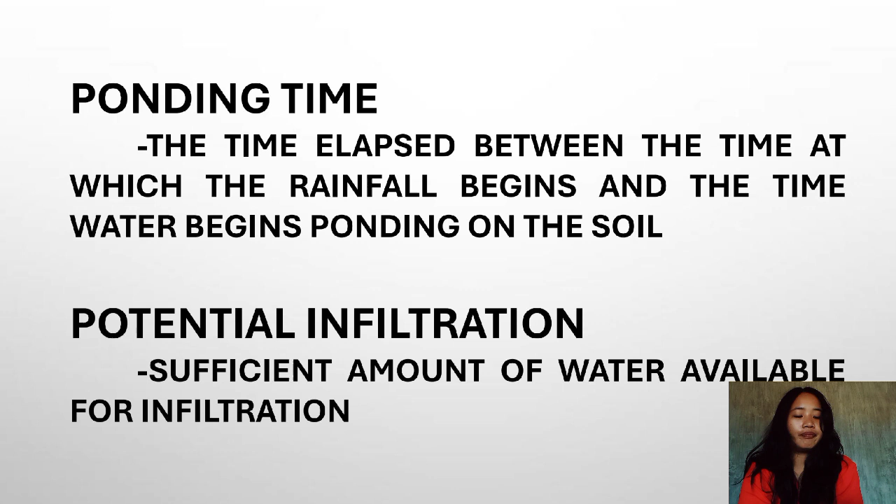Potential infiltration is the sufficient amount of water available for infiltration. Before ponding, the infiltration rate is equal to the intensity of rainfall, meaning that whatever rainfall is falling is infiltrated into the ground. After ponding, infiltration will be potential infiltration.

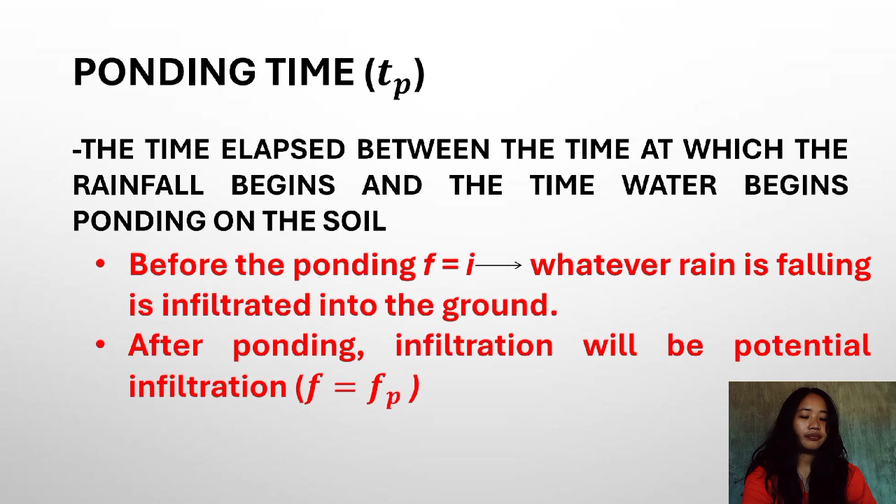Mein and Larson, 1973, presented a method of determining the ponding time using the Green-Ampt equation. So there are three principles involved. First, for time equal to ponding time, all rainfall is infiltrated into the ground. Second, potential infiltration is a function of cumulative infiltration. The last one is, ponding occurs when potential infiltration is less than the intensity of rainfall.

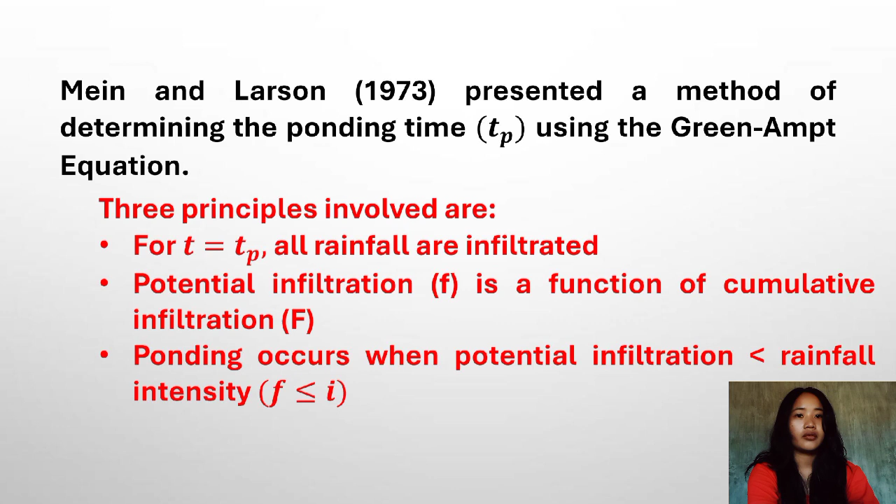As the rainfall continues at time greater than the ponding time, the saturated zone extends deeper into the soil and overland flow occurs from the ponded water.

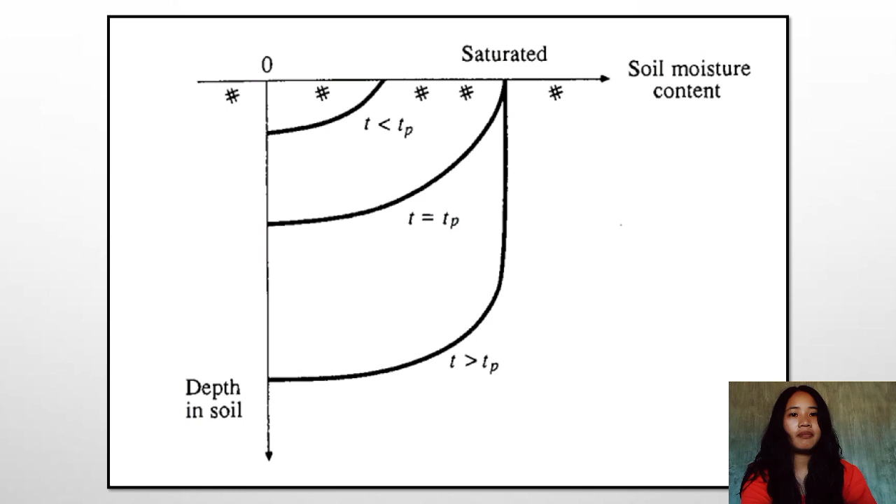So in deriving the equation for the ponding time, we will assume that the time of rainfall is equal to the time of ponding. So at t equals tp, the infiltration rate is equal to the intensity of rainfall, and the cumulative infiltration is equal to the intensity of rainfall multiplied by the ponding time.

According to the Green-Ampt equation, the infiltration rate is equal to K multiplied by 1 plus psi delta theta over F. So, since the infiltration rate is equal to the intensity of rainfall, and cumulative infiltration is equal to the intensity of rainfall multiplied by the ponding time, we will just substitute the values into the given equation. Then we will get this.

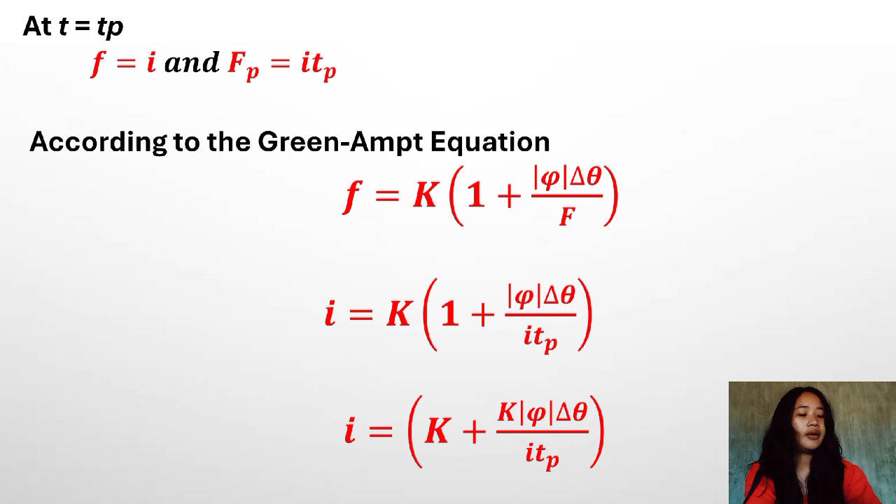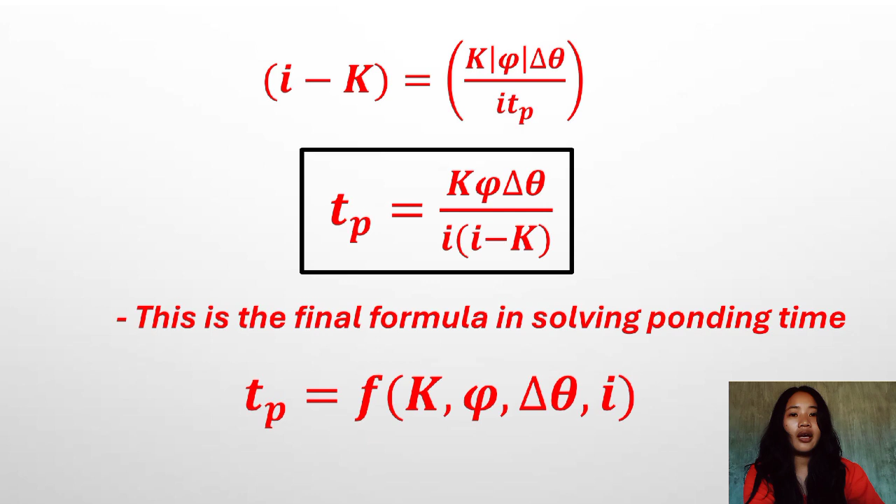And so by deriving, we will get the final formula for solving ponding time, which is tp equals K multiplied by psi multiplied by the change in theta over intensity of rainfall multiplied by intensity of rainfall minus K. So, generally, ponding time is a function of K, which is hydraulic conductivity, psi, soil suction, change in theta, or the change in soil moisture content, and i, which is the intensity of rainfall.

Sample problem. Compute the ponding time and the depth of water infiltrated at ponding for a silt of 30% initial effective saturation, subject to rainfall intensities of A, 1 cm per hour and B, 5 cm per hour. Given the hydraulic conductivity is equal to 0.65 cm per hour and the product of psi and the change in theta is equal to 5.68 centimeters.

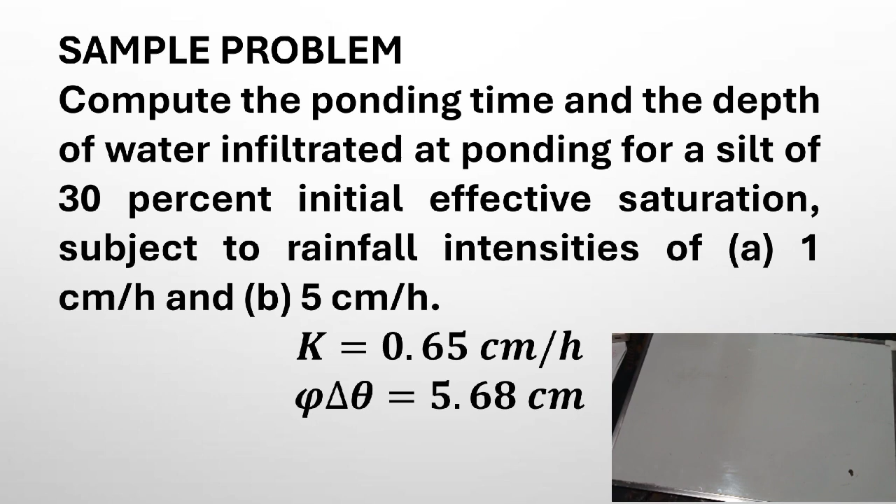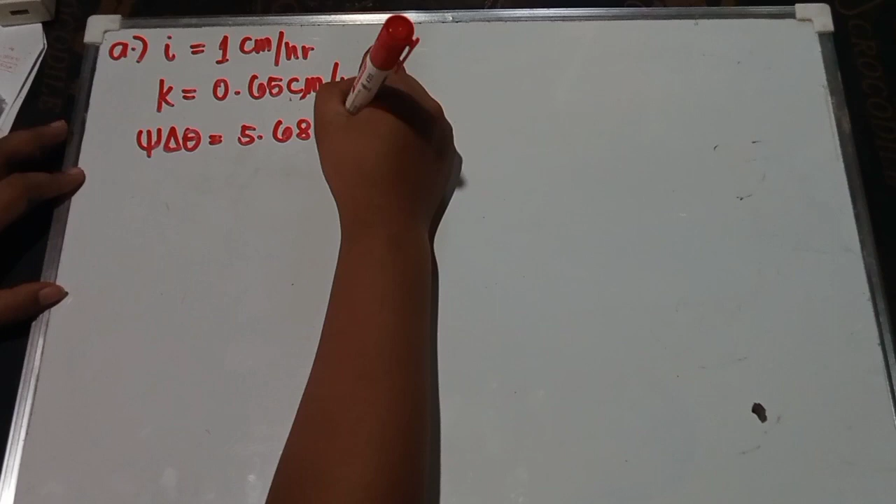So first, let's write the given. In letter A, intensity of rainfall is equal to 1 centimeter per hour. Hydraulic conductivity is equal to 0.65 centimeters per hour. And the product is equal to 5.68 centimeters.

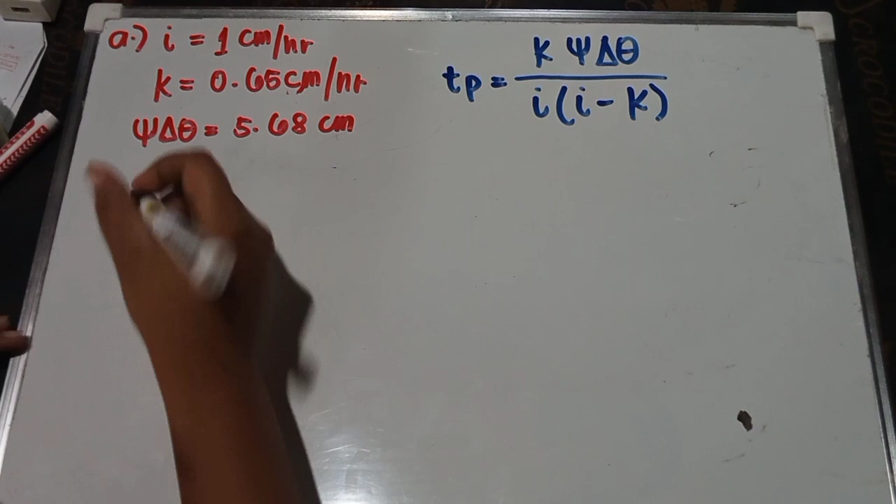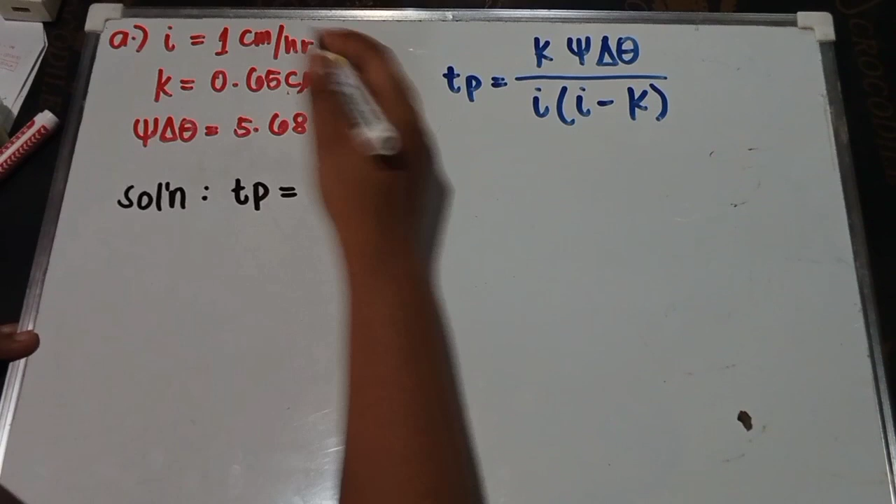TP is equals to hydraulic conductivity multiplied by the product of psi and delta theta, which is 5.68 centimeters, over intensity of rainfall na 1 centimeter per hour multiplied by, again, 1 centimeter per hour minus 0.65 centimeter per hour. So, masasolve natin ang TP dyan, guys, is

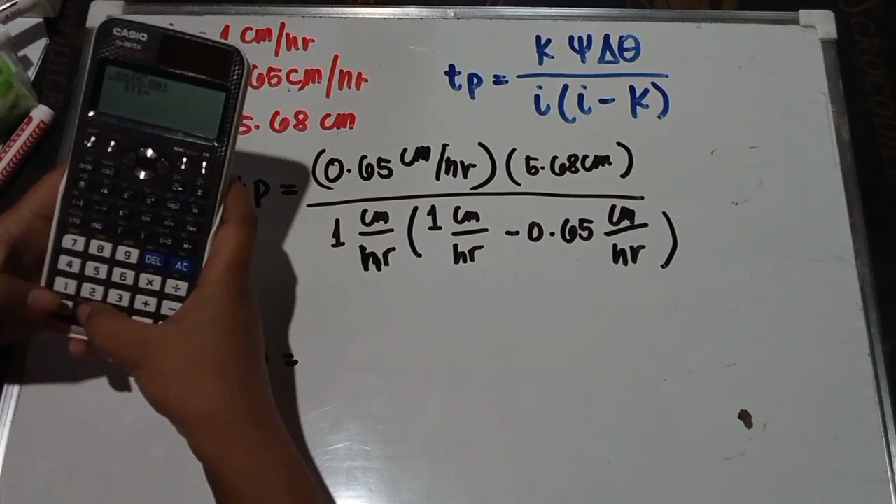0.65 multiplied by 5.68 times 1 times 1 minus 0.65 is equals to, so, ang ponding time natin is 10.5 hour. This is our ponding time at I is equals to 1 centimeter per hour.

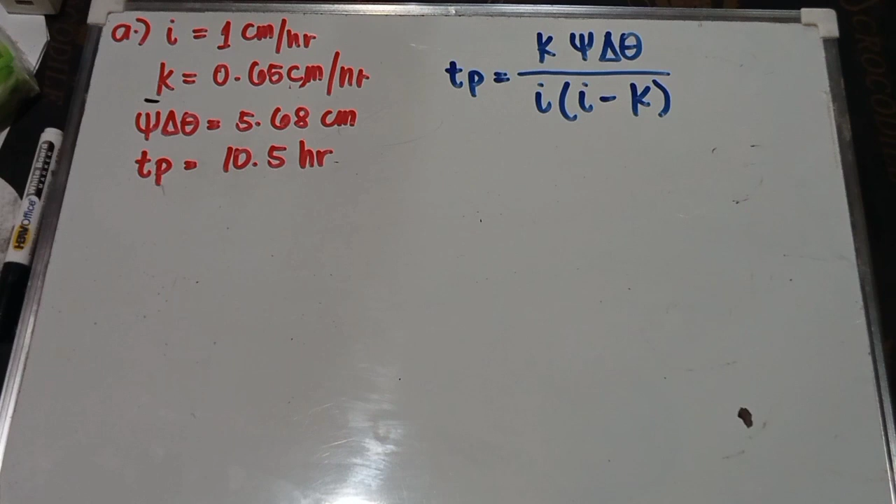So, next is isosolve naman natin yung depth of water infiltrated at ponding. So, since ang ponding time natin is equals to 10.5 hour, ang formula lang na gagamitin in solving the depth of water infiltrated is F of P is equals to intensity of rainfall multiplied by the ponding time. So, need muna natin solve yung value ng ponding time. Pero nasolve na natin kanina, which is 10.5 hours. So, input na lang din.

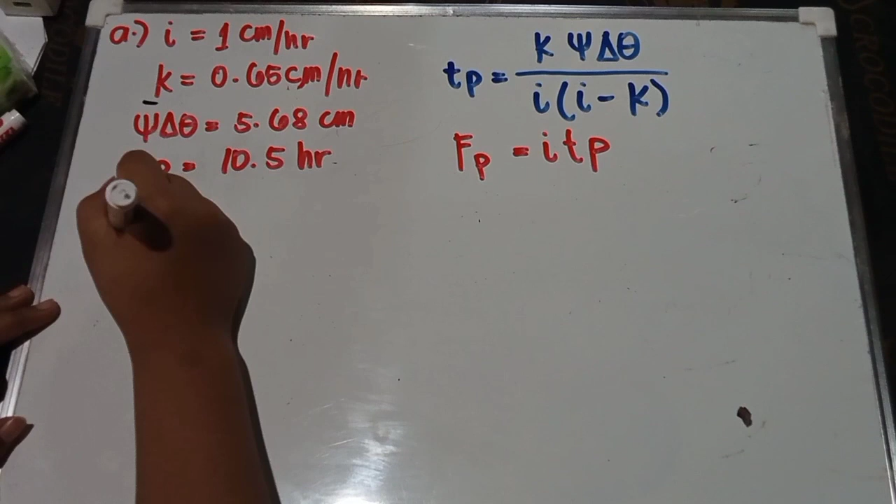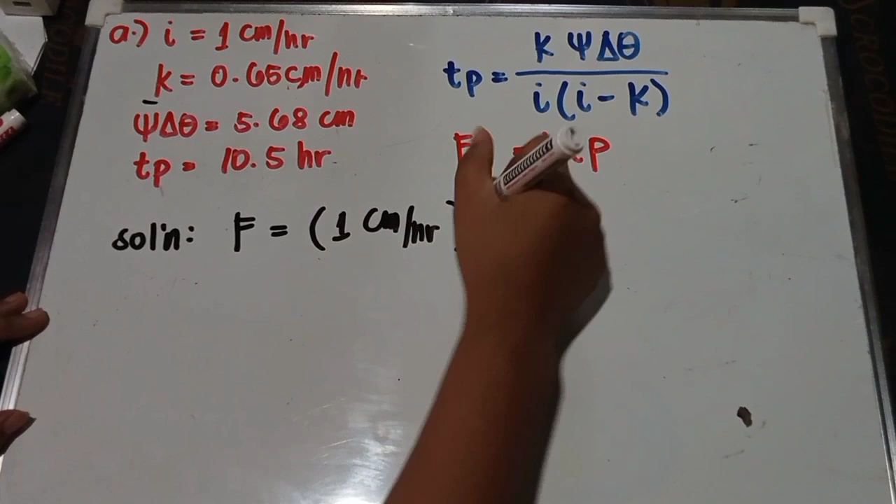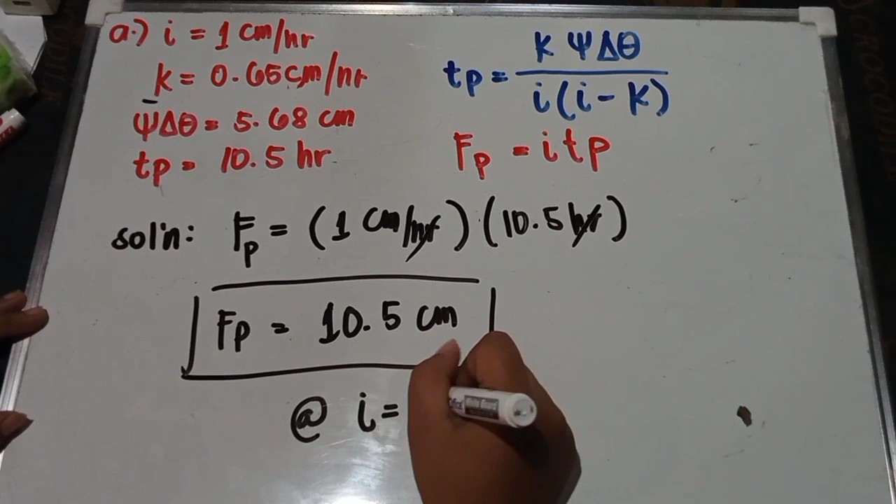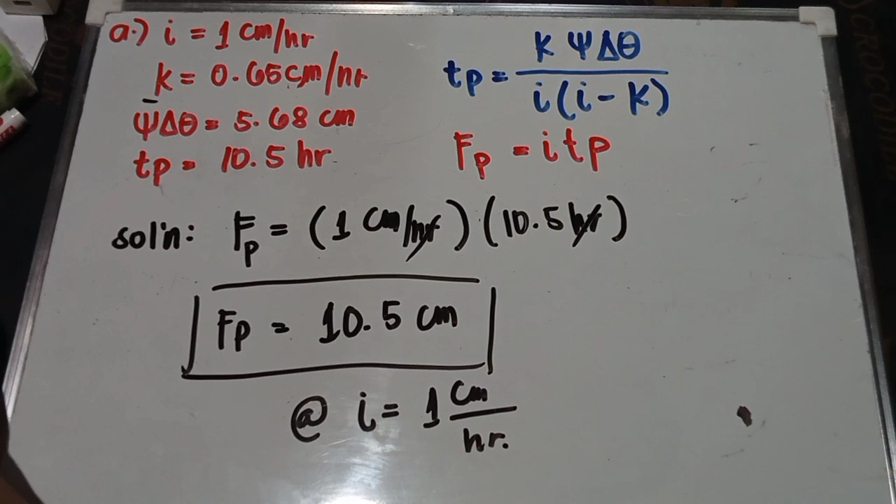So, solution, F is equals to 1 centimeter per hour multiplied by 10.5 hour. So, F of P natin, cancel lang yung hour, will be 10.5 centimeter, again, at I is equals to 1 centimeter per hour. So, how about naman po dun sa, if yung intensity of rainfall natin is 5 cm per hour. So, solve natin.

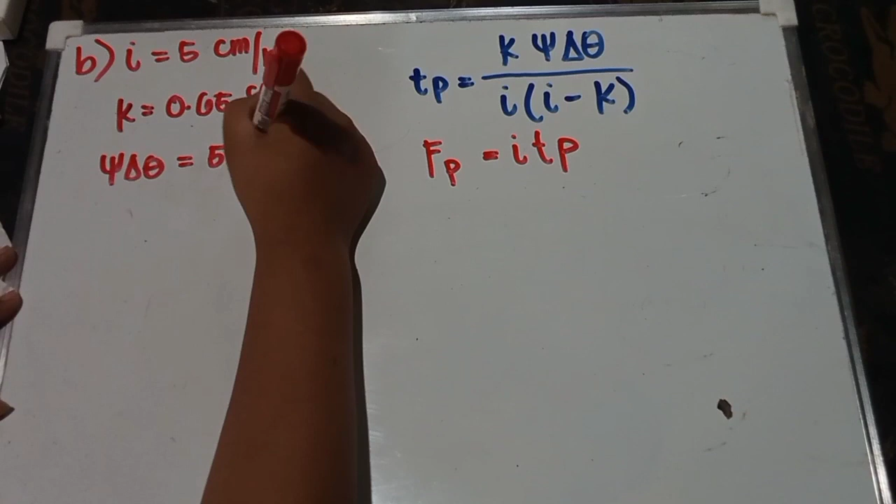So, letter B, which is ang intensity of rainfall naman natin is 5 cm per hour. So, lahat ko na lang ulit tong mga nabura ko. 0.65 cm per hour yung K. So, ayan, delta theta is equals to 5.68 cm. So, input na lang din ulit natin. Solution.

TP is equals to 0.65 cm per hour multiplied by 5.68 cm over 5 cm per hour times 5 cm per hour minus 0.65 cm per hour. So, ang value ng TP natin at intensity of rainfall is equals to 5 cm per hour is 0.1697 or 0.17 hour. That is our ponding time at intensity of rainfall is equals to 5 cm per hour.

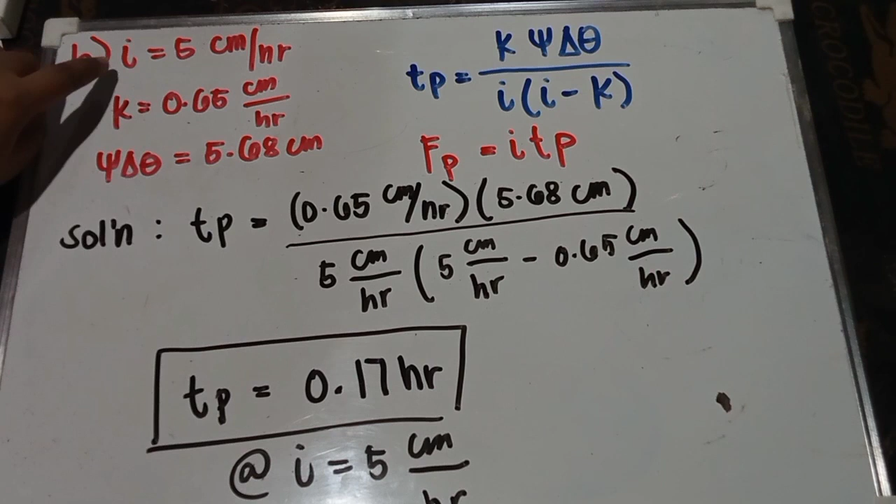So, ayan, isa-solve din ulit natin yung depth niya at this intensity of rainfall. So, using this equation ulit. Since ang na-solve natin ponding time is equals to 0.17 cm. Ay, oh my gosh. Yes. 0.17 hour. So, ngayon, solution for the depth. Depth of water infiltrated.

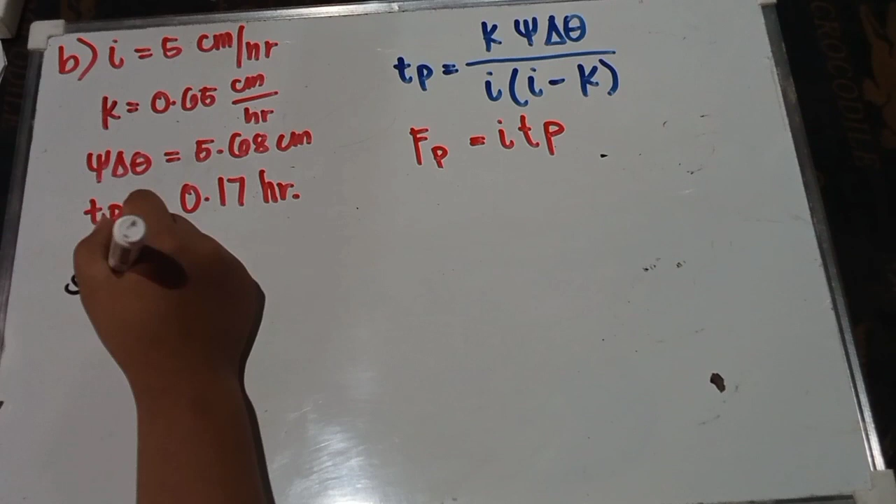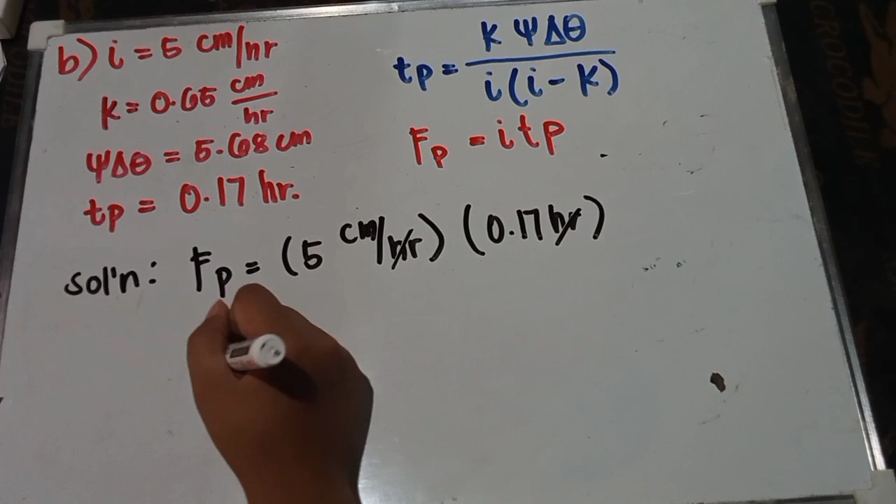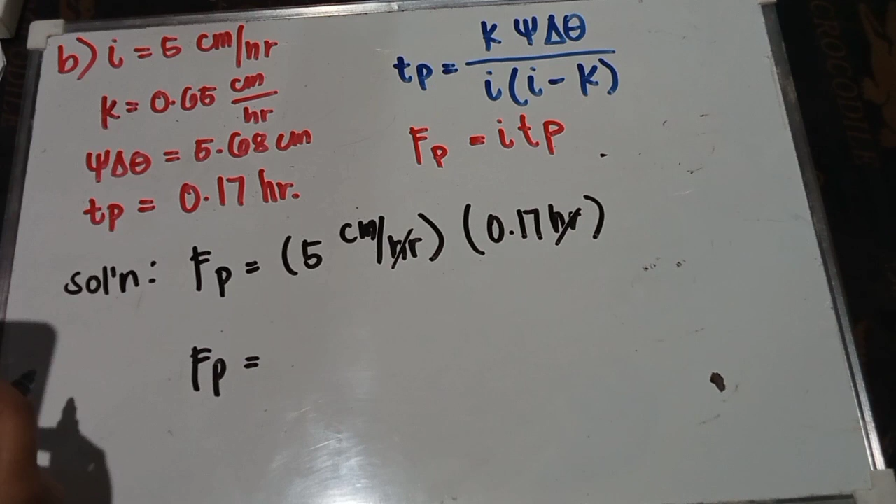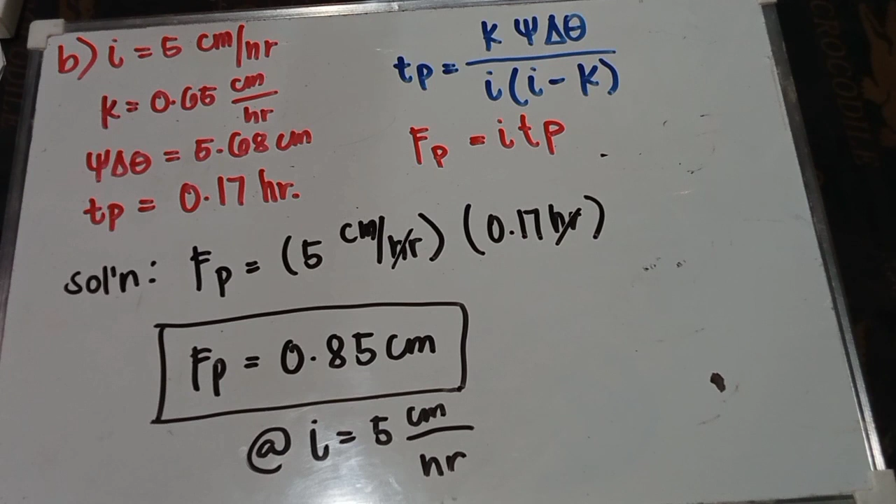F of P is equals to 5 cm per hour multiplied by the ponding time which is 0.17 hour. So, cancel. Ang F of P natin is 0.85 centimeters. So, yan po yung depth of water infiltrated at intensity of rainfall is equals to 5 cm per hour. So, ganun lang kasimple guys ang pagsosolve ng ponding time.

Using the Green-Ampt equation, we will derive a formula for the cumulative infiltration to be used on the infiltration after ponding. So, according to Green-Ampt equation, cumulative infiltration minus absolute value of psi times delta theta times ln of 1 plus cumulative infiltration over psi times delta theta is equals to hydraulic conductivity multiplied by time.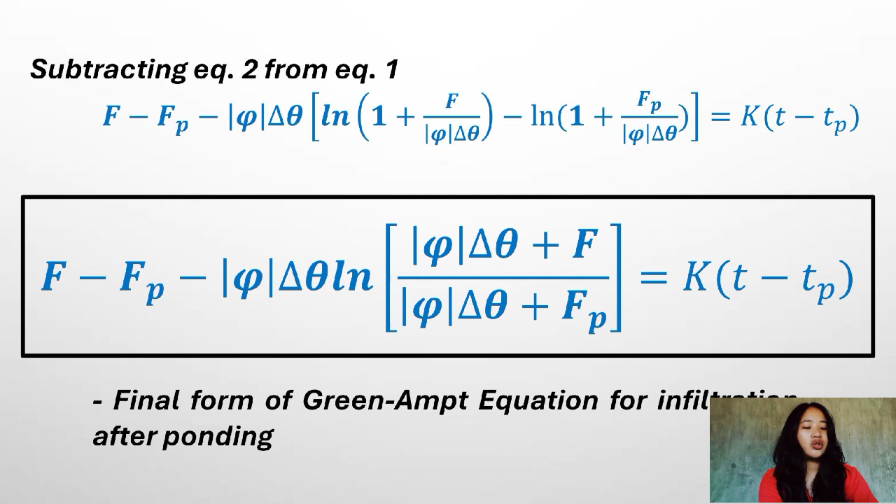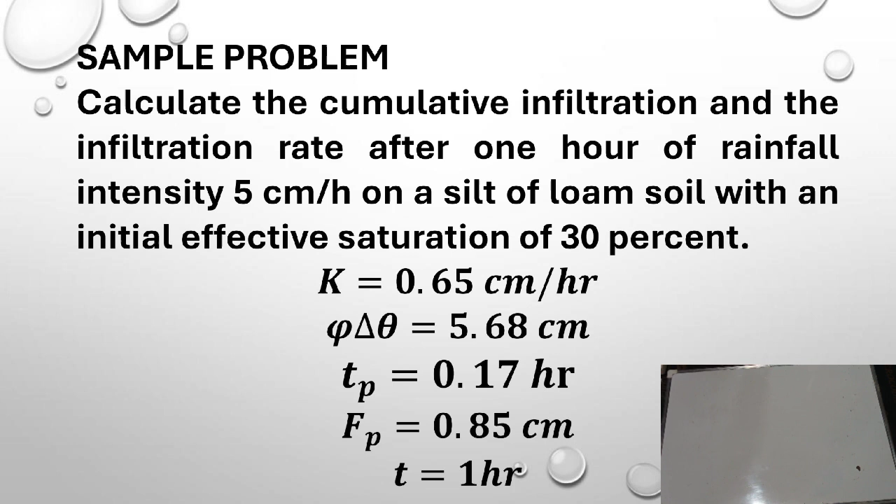So, sample problem. Calculate the cumulative infiltration and the infiltration rate after 1 hour of rainfall intensity, 5 centimeters per hour, on a silt loam soil with an initial effective saturation of 30%. So, kung mapapansin nyo po, medyo same siya dun sa example ni Ms. Cortez, pero so, given.

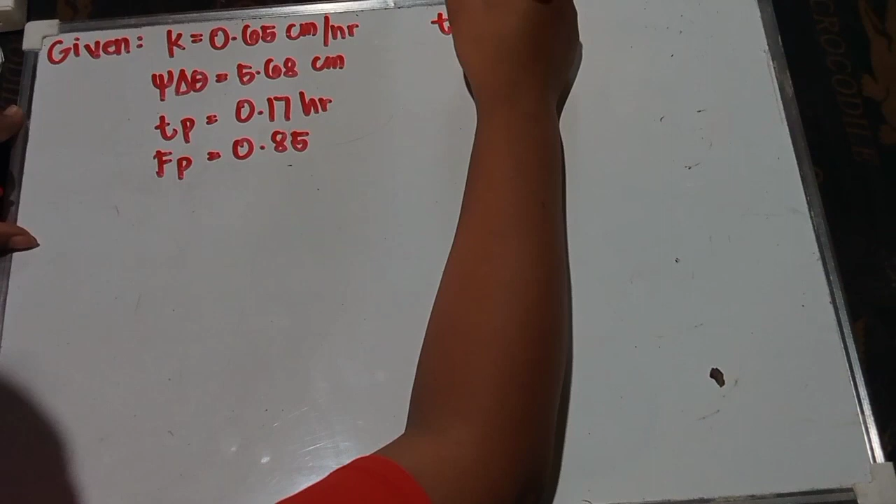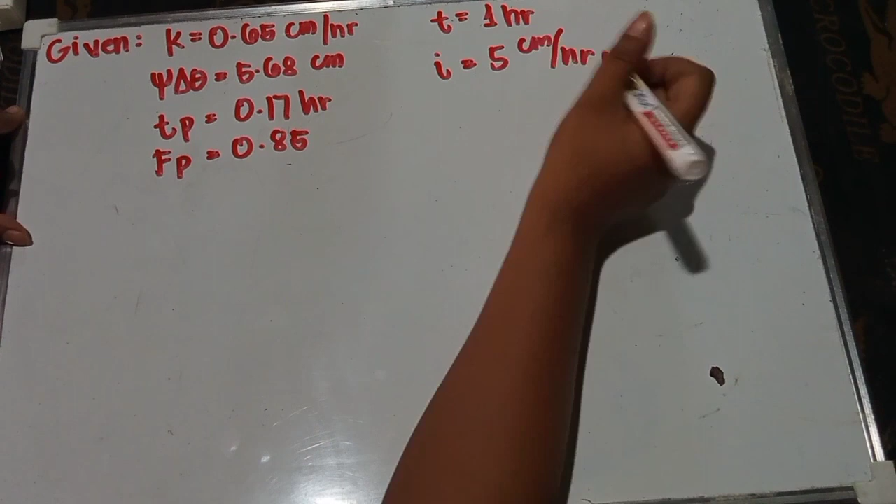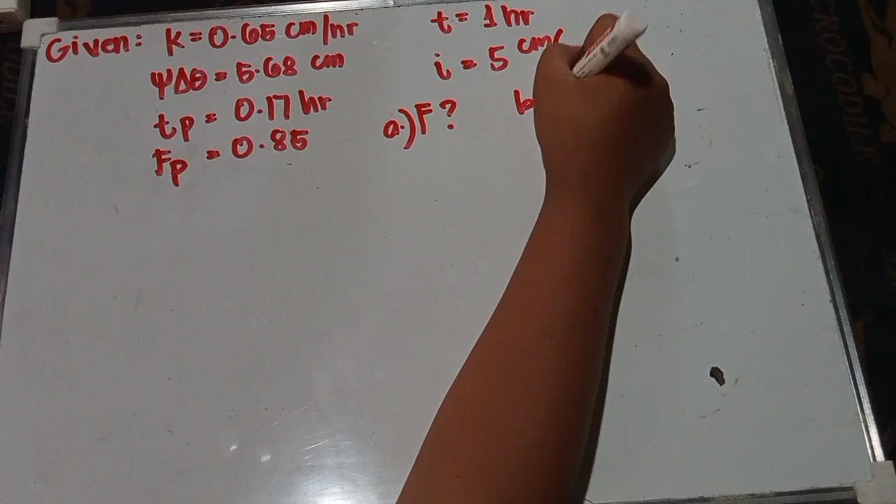So, ang hinahanap dito guys is cumulative infiltration or, anyways, I don't think magagamit natin yung F of P pala here. So, let's check ko lang guys. Yes, magagamit. So, ang hinahanap dito is the F in letter A, and letter B is the infiltration rate. So, yan po yung dalawang hinahanap: the cumulative infiltration and the infiltration rate.

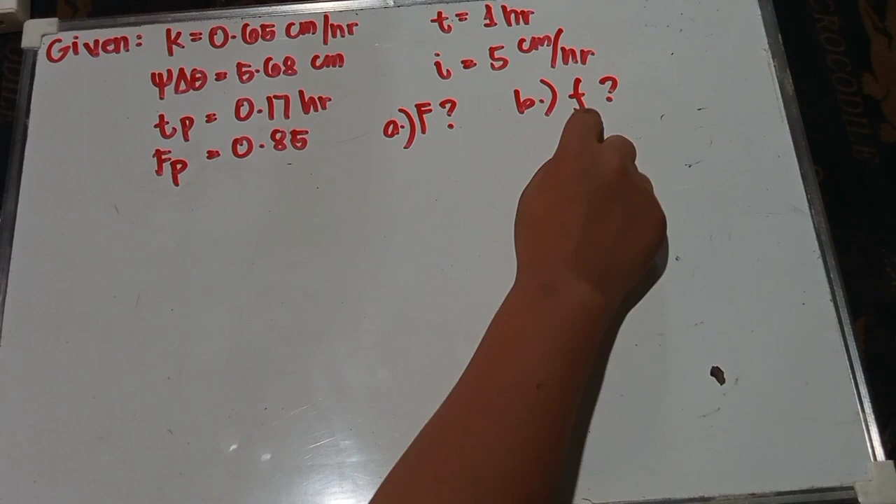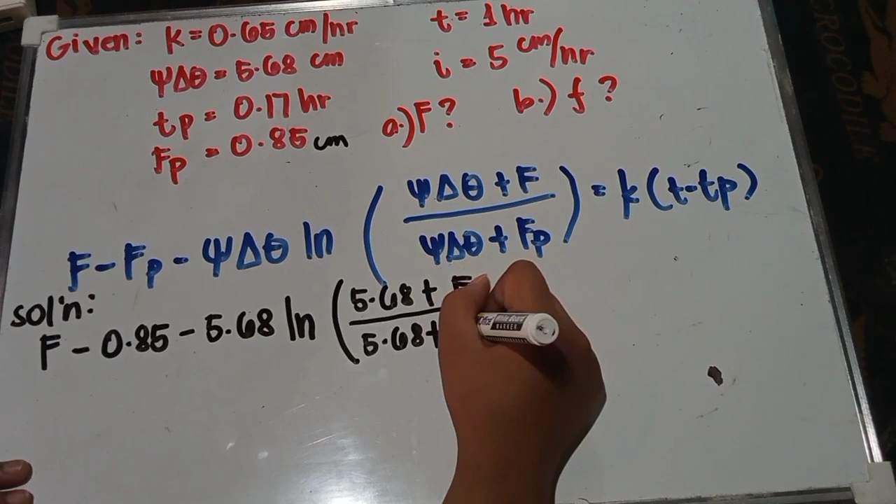So, ang F, solution: F minus 0.85 minus 5.68 centimeters ln of 5.68 plus F over 5.68 plus 0.85 equals to

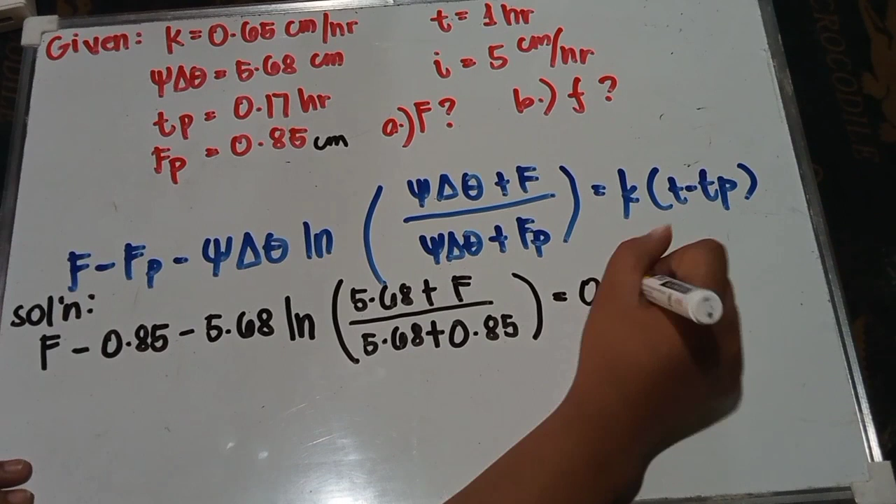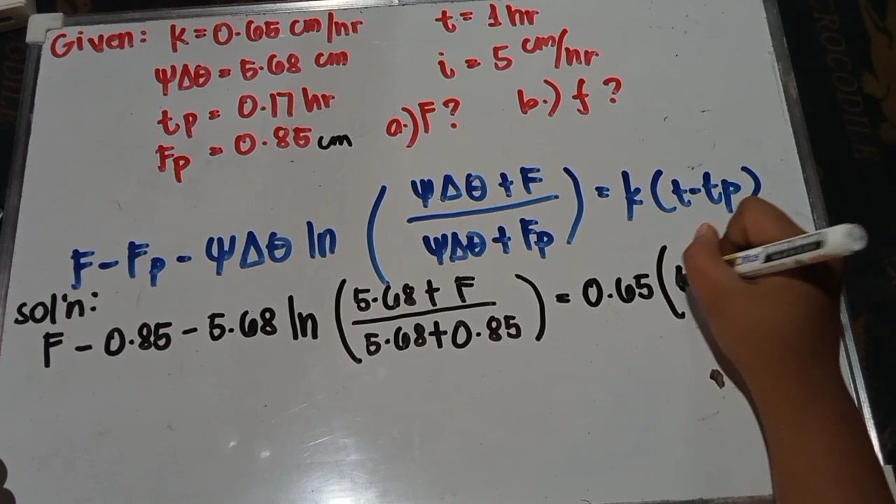hydraulic conductivity, 0.65 centimeters per hour. Oh my gosh, hindi na pala siya kasya. Wait lang. 0.65 times ang time natin is 1, and our ponding time is 0.17. So guys, using shift solve, ang makukuha nating cumulative infiltration is equals to 0.54 centimeters.

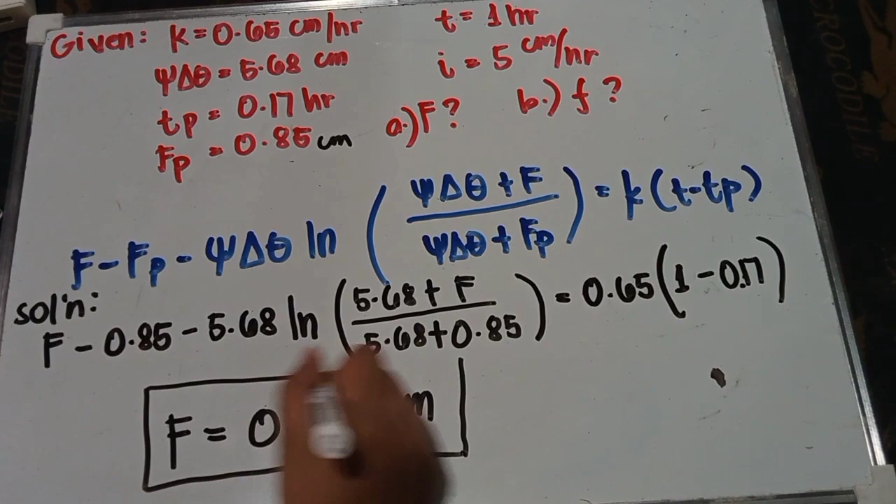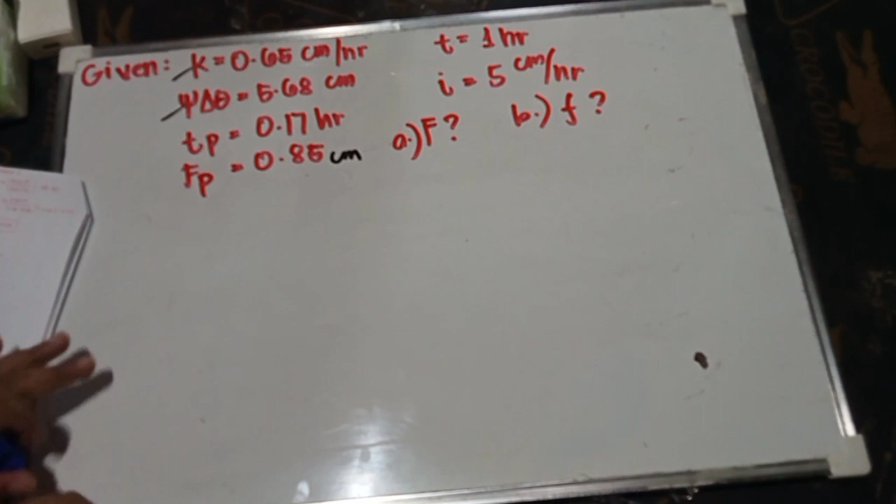So, ngayon, ang isasolve naman natin is the infiltration rate. We're going to use successive substitution. So, ang gagamitin nating formula for the successive substitution para makuha natin yung F is this formula.

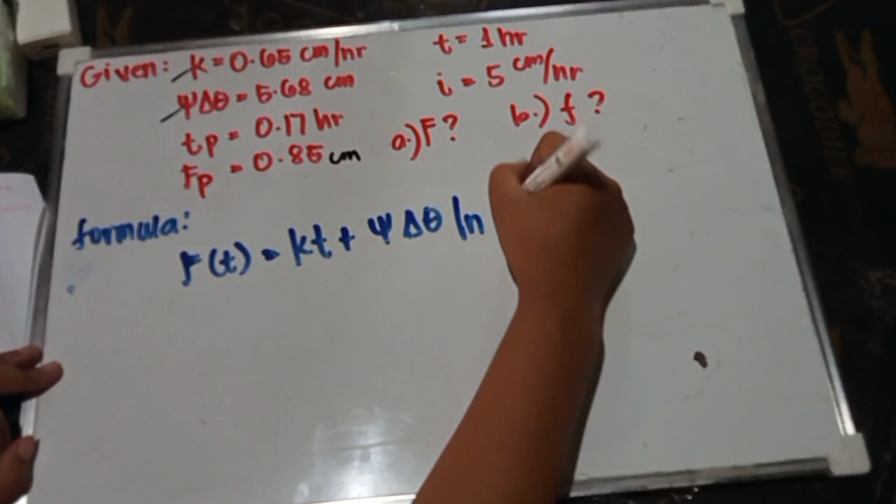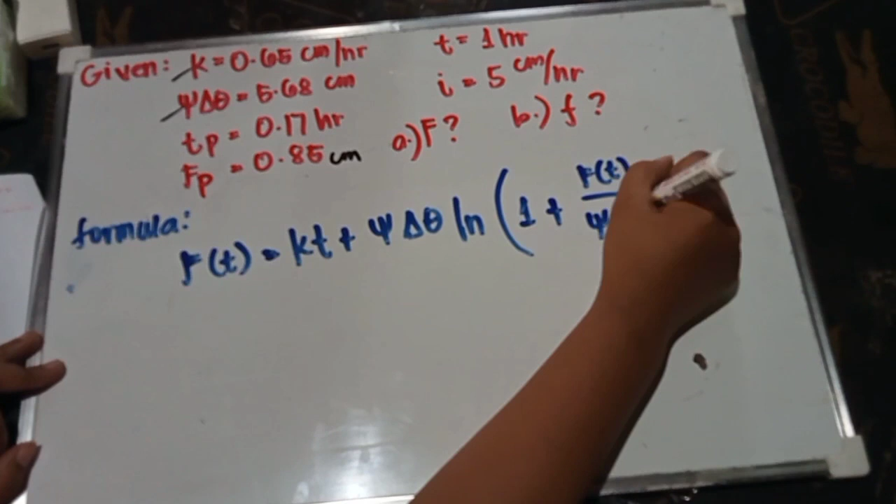F as a function of time equals to K multiplied by time plus psi times delta theta, again, ln of 1 plus F(t) over psi delta theta. Yan. Yan yung formulang gagamitin.

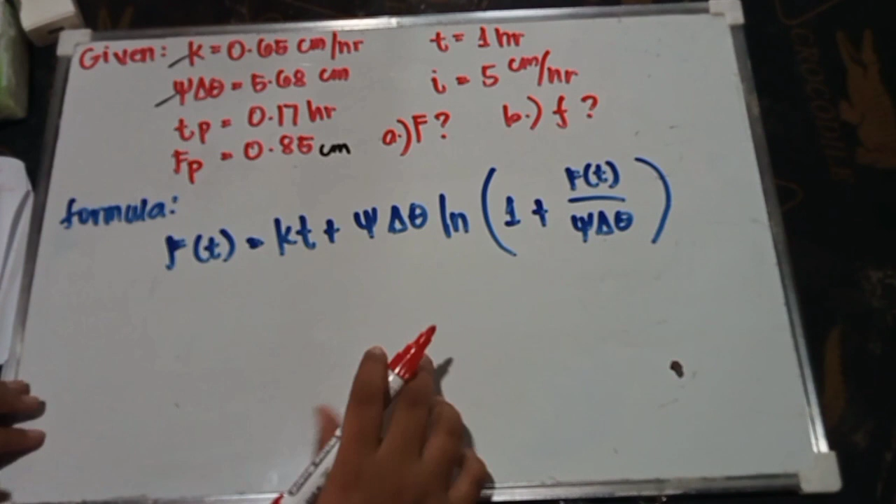So, pa-take note na. Since wala tayong value ng F of t dito, hindi natin siya masosolve. So, initially, almost all, ang ginagamit nilang F of t here as an initial is same as the value of the hydraulic conductivity. In doing so,

ang time natin is 1, plus 5.68 ln of 1 plus 0.65 over 5.68. So, ang makukuha nating F of t dito guys is 1.27

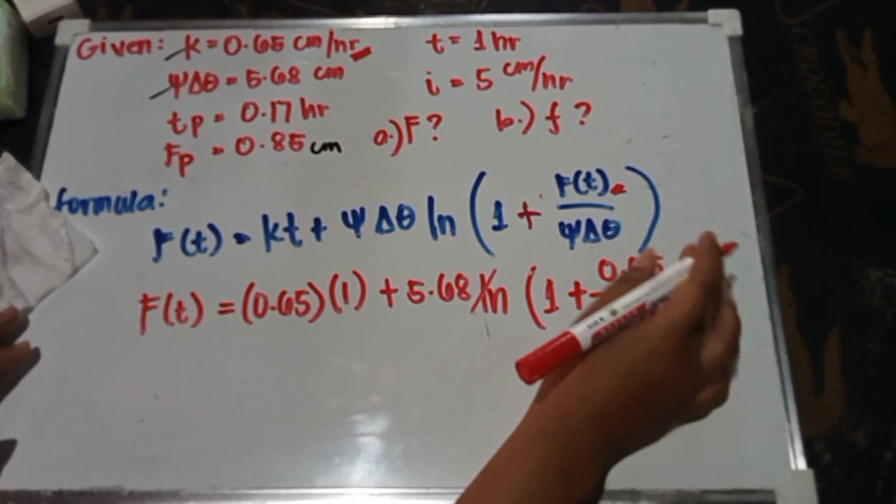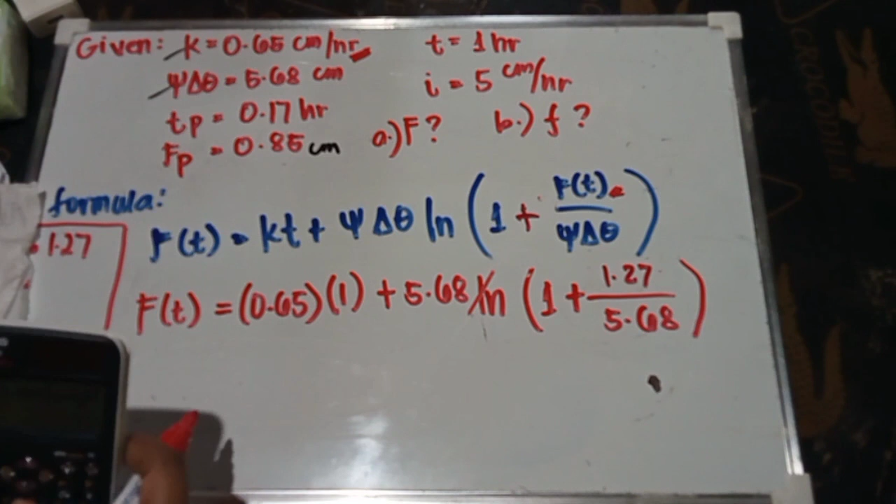So, 0.65 plus 5.68 ln of 1 plus 1.27 over 5.68. 1.80 naman to. Then again, ang gagamitin mo na naman na F(t) susunod is ito. Ilalagay mo naman siya dito. So, ganun lang siya guys hanggang sa

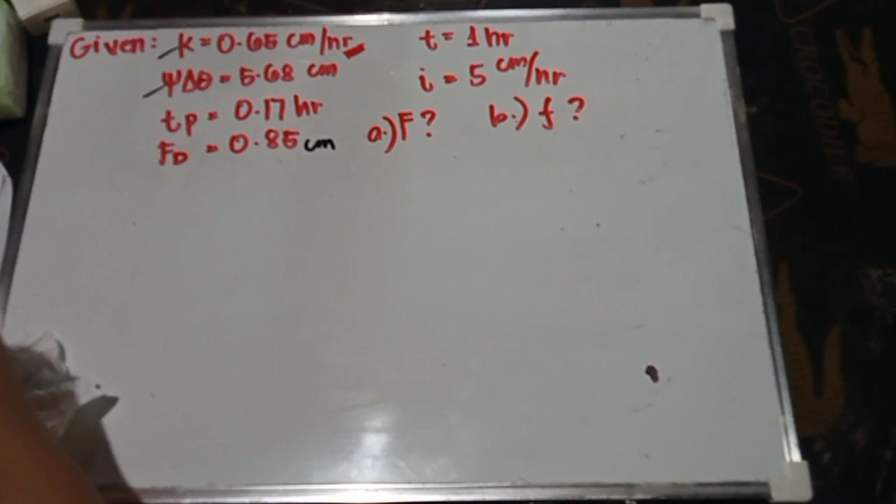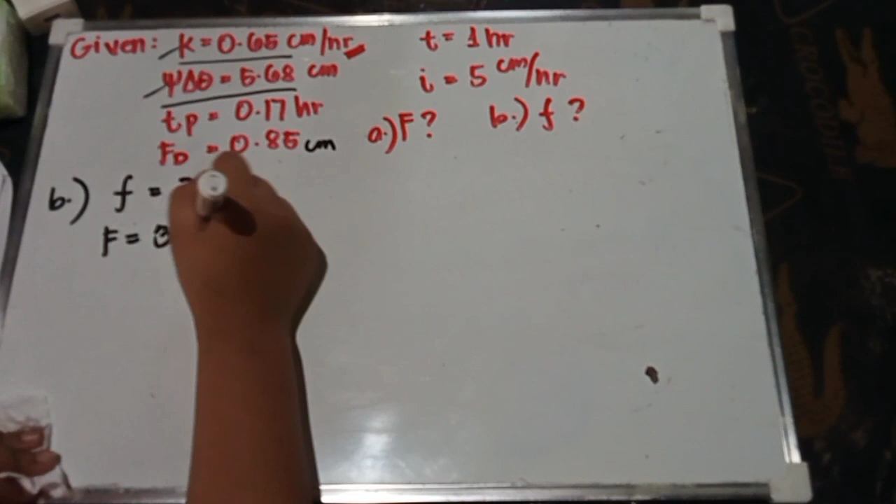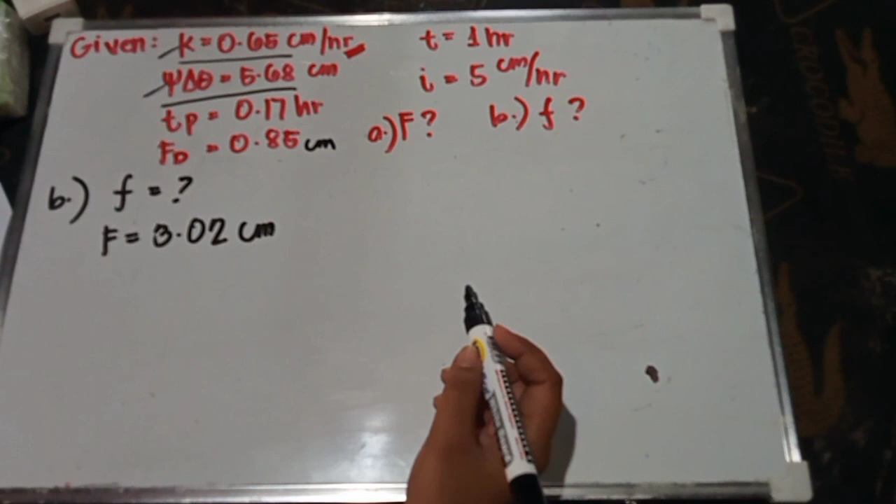Yan. So, ang given natin dito is ito, and F is equals to 3.02 centimeters, which is from the book ko. But yung na-solve ko guys is 3.04. So, ito na lang sa book, baka mas accurate. Ang mga given lang na gagamitin natin is the hydraulic conductivity and the product of psi and delta theta, and of course, our F, which is 3.02 centimeters. This is using the convergence of successive substitution.

So, to solve the infiltration after ponding, f is equals to K times psi delta theta over F plus 1. Yan yung formula. Then, substitution na lang ulit. 0.65.

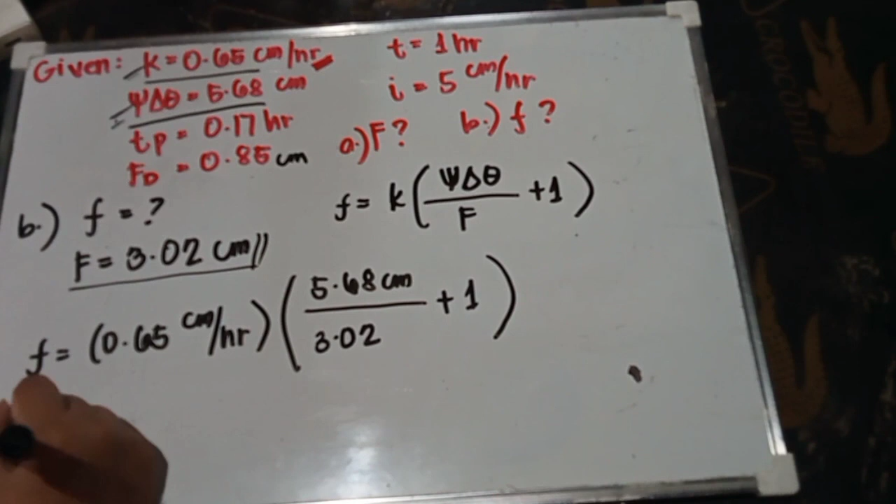So, ang infiltration rate natin after ponding is 1.87 cm per hour. Answer sa letter B. That is the infiltration rate after ponding.